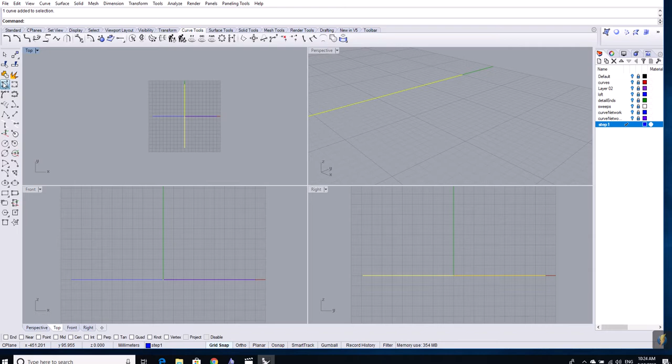So I'm going to use the control point curves, and I'm just going to use something simple as a demo. So don't think that this is serious design or good design or anything like that. I'm just really demoing the technique here.

Now, if I want to end up with a 3D print, one of the things you want to do when you're mirroring is hold down the Shift key and make sure that your first line will be perpendicular. Okay, so that blue line is my construction line, and I'm going to use the O snaps now. And the O snaps are tricky because you have to remember to turn them off, but I'm going to use the near for this one. And near is very tricky, so you just have to remember to turn it off after you use it.

So now I know that I'm on the construction line, and I hold down Shift and click again. And what that does is my first line is going to be 90 degrees to that construction line, so that when I mirror it, there's not going to be a sharp edge or anything in the geometry. It's going to be really smooth. Okay. Actually, I'm going to try that again.

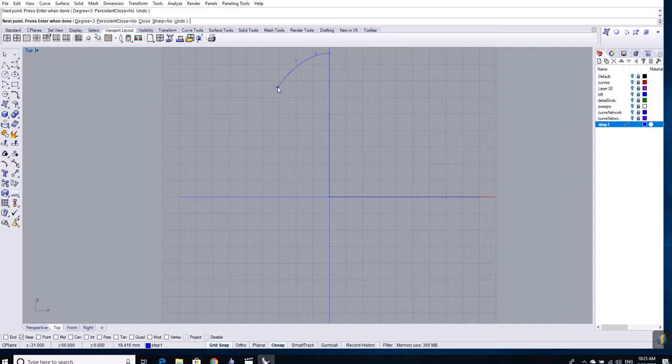Okay. Yeah, I can get the feedback from the O-snap that it's near, and I'm clicking Shift, and I'm clicking again. So now my curve is coming down this way, and I'm just drawing it really quick, freehand. There's nothing special about it. And I'm going to click here and do the same thing. I'm going to add Shift, and then it's giving me feedback that I'm near. Okay, so that's good. I like that.

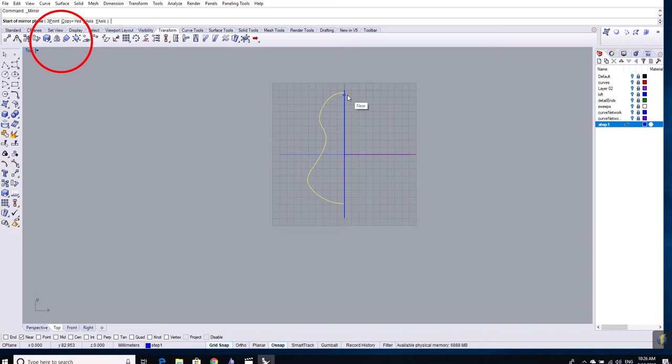So there's my first line I'm going to draw, and now I'm going to mirror it with our, remember the mirror tool, everybody's learned how to use that. So if I click on it, here's where I'm using my construction lines, because it's saying what is the start of the mirror plane. Okay, and then what is the end of the mirror plane.

So it's snapping to that construction line, and then I get what I want, which is a symmetrical closed shape where the endpoints of each of these two lines touch, so that there's not going to be any holes. Because the next tools we're going to work with, if those lines don't touch perfectly, then it can be a real problem. The tools won't work well.

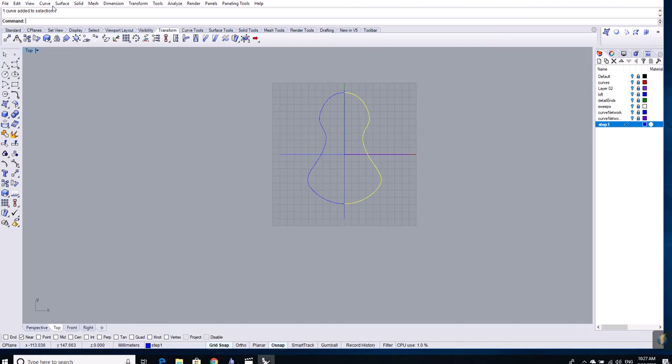So let's zoom in here and have a look. And the first thing I'm going to do is if I go to the next view, the perspective view, the next line I'm going to make is going to go up on the Z-axis. Okay. So now we're getting into lines in 3 dimensions, and that becomes a bit complex, but this is how we're going to do it.

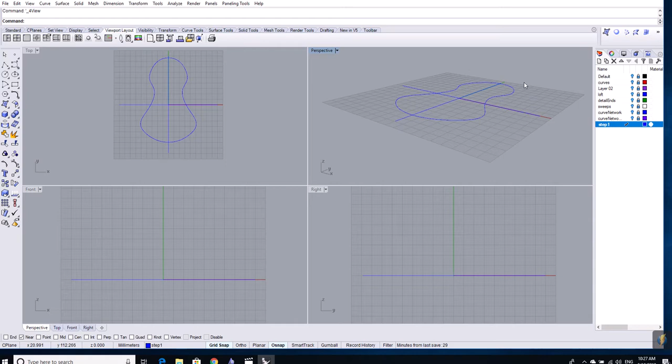So I'm going to select that one, and I'm just going to copy and paste it. So now I've got 2 of those lines. So when I go here to select, I've got 2 curves that are exactly the same. I'm going to pick that one, and then I'm going to use the 2D rotate tool here.

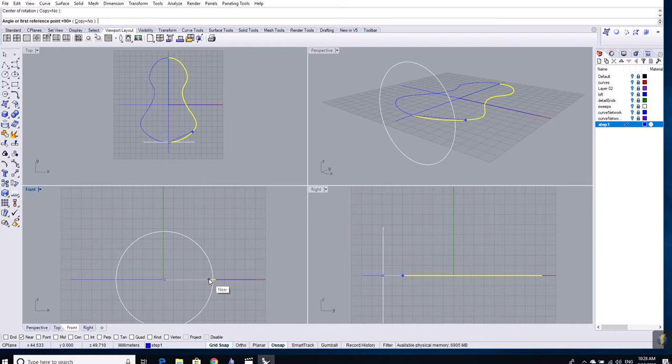I'm going to go down to the front view, click there, click the end of the line, and then holding down the Shift key, I'm going to go 90 degrees. And then here's what I get. I get this line coming up here, and then the next thing we're going to do is make cross sections.

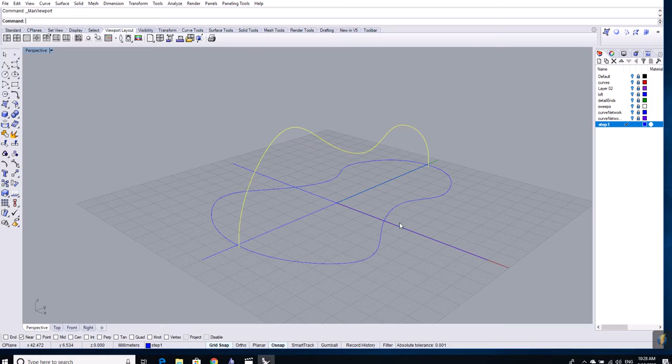So if I want to edit this line before we make the cross sections, it's really simple. I just have to turn on control points. Okay, so Window F10, turn on the control points, grab a control point and edit. It allows you to sort of fine tune the geometry you're making. And again, I'm just sort of running through this. I'm not really designing anything nice. I'm just sort of playing around with it so that you learn the techniques.

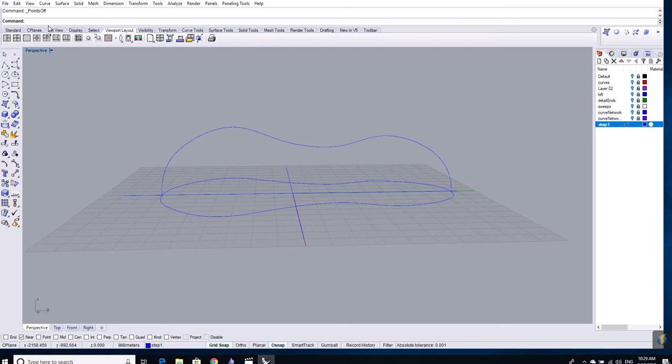Okay, so if I go with that, that curve is different than the ones on the side, but the whole form is still symmetrical. It's all good. And I'm going to turn off the control points, F11. And here's what we've got. Oh, look what happened. We made a big boo-boo.

Okay, I just cheated. I fixed up that wonky line, and when you start to make lines in different dimensions, you just have to watch out; it's usually the case that you want to edit the control points in 2D. But anyway, I deleted it. I went through the steps again, and I made sure that it was straight in that dimension. Okay.

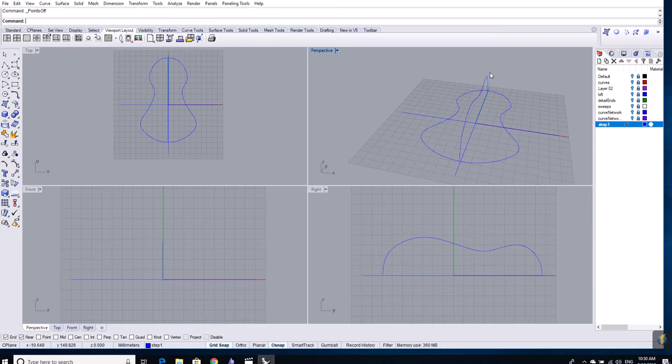However you do this, you have to make sure that all of the three lines are actually touching. And what I mean is that that line and that line are all touching at the same point. And if that's not the case, then you have to go back to the previous step and redo it. Okay, so there's one, like those three lines are touching. So you have to use the O-snaps correctly so that that happens. If not, then the next tools won't work effectively.

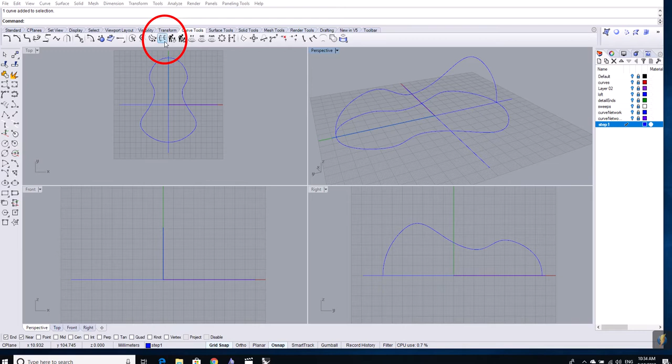Next thing we're going to do is make cross sections of this three-dimensional, almost like a drawing made out of wires in space, and we're going to make cross sections. Two curves are going to be cross sectioning. So the tool that we're going to use is Curve from Cross Section Profiles. Go to Curve Tools. You can see that there's this icon there, and when you roll over it, it says Curve from Cross Section Profiles. That's what we're using. Okay, I'm going to click on that, and it's saying select profile curves in order.

So here's another thing about a lot of these curve network tools. You have to go in order. So I'm going to go 1, 2, 3, and then hit enter. All right, that sequence is really important. And the command line with these complicated tools starts to tell you what the sequence is, and you'll have to practice it a whole bunch of times before you get it to work. I'm cheating in the demo because I pause and go back and fix things, but that's like smoke and mirrors. I get to do that because I'm recording, but it'll take more practice.

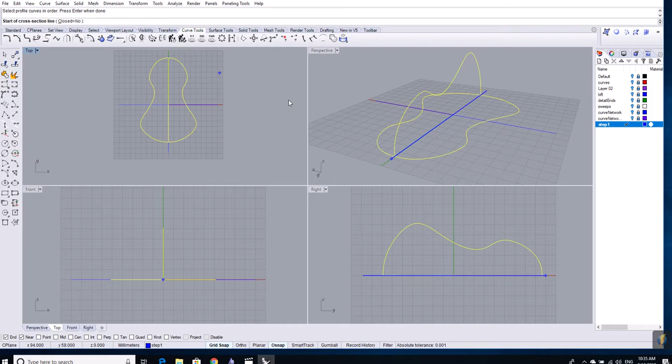Okay. So start of cross section lines. And now at this point, I've got to be careful that I can't do this in the perspective mode. I have to go to the right side, and I'm going to make a cross section there. I'm holding down the Shift key, and then I'm going to make another one here. Hold down the Shift key so that it's straight. And I like that. So now here I've got two cross-section lines, and the next thing we're going to do is try and turn the entire line network into a surface, and hopefully it's going to work the first time. It's a tricky one because if any of these lines don't touch perfectly, then it won't work. It's very finicky.

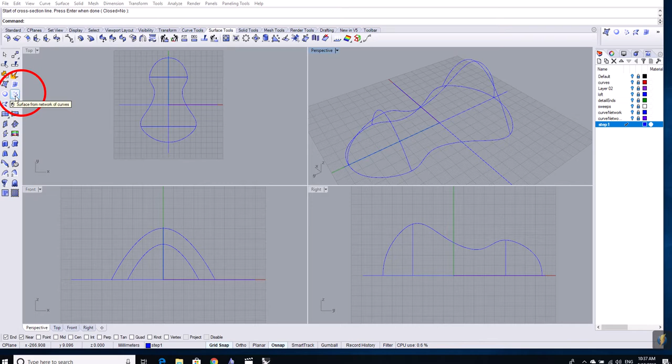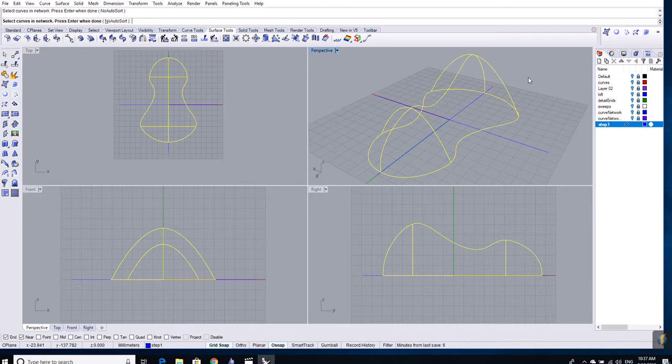All right, so if we go to Surface Tools, the icon we're going to be working with is this one. It's called Surface from Network of Curves. Click on that. Select curves in the network. Now again, you probably have to try this a few times, but I'm going to go in the same sequence I went before. 1, 2, 3, 4, 5. Press enter when done. All right, and you should see something like that. This is a good indication that it's probably going to work.

And I'm not gonna get into any of the options here. Let's just say okay, and let's see what happens. And it worked. Wow, I didn't even have to cheat. It just worked. So here's what you get: some very complex surfaces with a minimum amount of control points. It's relatively low polygon, and that's a really powerful tool, and that's why we're using Rhino. It does things like that.